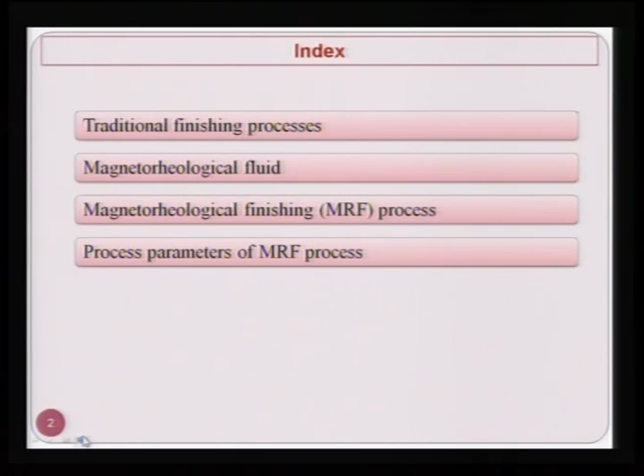Today I am going to discuss a finishing process that is named as Magnetorheological Finishing, abbreviated as MRF process. The contents of this talk are as follows: traditional finishing processes, magnetorheological fluid, magnetorheological finishing process, process parameters of MRF process, and applications of MRF process.

Traditional finishing processes - we have already seen at some other places, in some other course, three well known traditional or conventional finishing processes. These processes are known as grinding, honing and lapping.

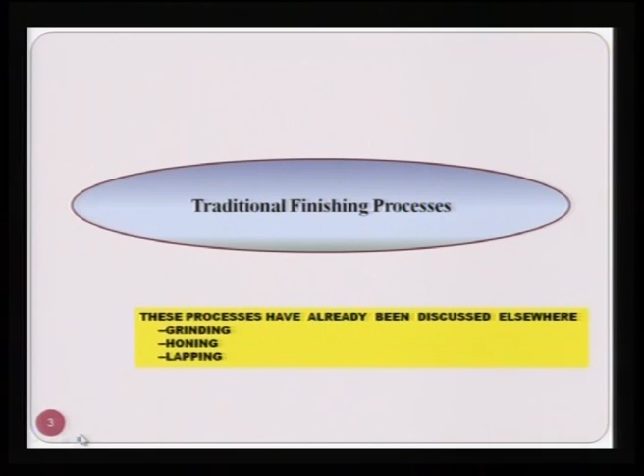All three processes have their constraints. Especially grinding has the limitation that it can only be applied for flat surfaces or cylindrical surfaces. Another problem with grinding is that a large amount of heat is generated, because of which thermal stresses are produced in the ground component. Thermal cracks are created, and this process cannot be used for a complex shaped geometry.

Honing gives a good surface finish, and not a very large amount of heat is generated, but it is limited to cylindrical, external and internal surfaces. Some other shapes can be machined, but not a very large variety of shapes can be machined by this.

The same limitations apply to lapping. Lapping is a very good, commonly used process, good for flat surfaces. It can give a very low surface roughness value, but it cannot be applied for complex shaped components. Also, to some extent in honing and lapping, some very fine thermal error or thermal cracks may be developed, which we will not be discussing here.

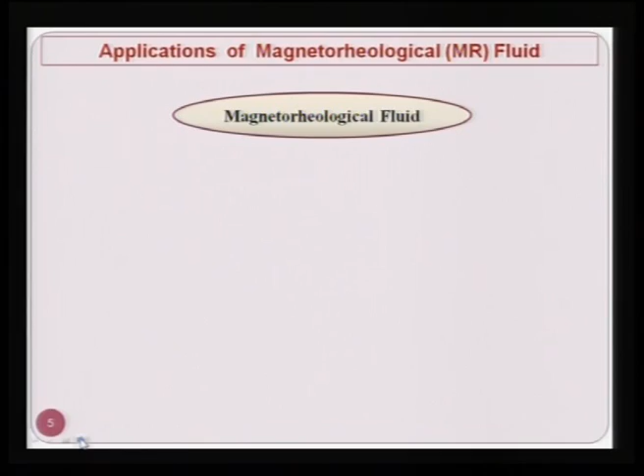Applications of magnetorheological fluid: magnetorheological fluid without having abrasive particles is also used for many other applications rather than only magnetorheological polishing. When we use this fluid for polishing purposes, we add abrasive particles which act as the finishing tool. As we will see here, the magnetorheological fluid has applications in clutches, brakes, dampers, etc.

The important point here to note is that this fluid uses non-magnetic abrasive particles. These particles include alumina Al2O3, silicon carbide SiC, and it can be diamond particles also. In this talk we are going to discuss the application of magnetorheological fluid in the field of finishing.

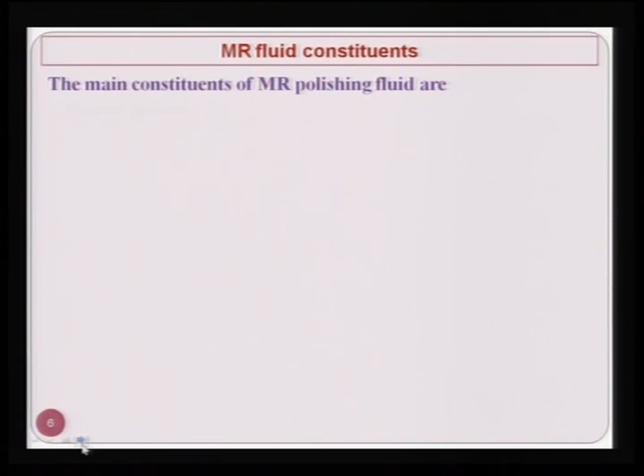Then there are various kinds of abrasive particles which are added to this fluid: cerium oxide, diamond powder, aluminum oxide, silicon carbide, boron carbide, etc.

The major constituent of any MR polishing fluid is the carrier fluid, and it makes a lot of difference as long as the performance of the finishing process is concerned. In case of certain workpiece materials, it is always recommended to use water as the carrier fluid, while in some other cases oil is recommended as the carrier fluid.

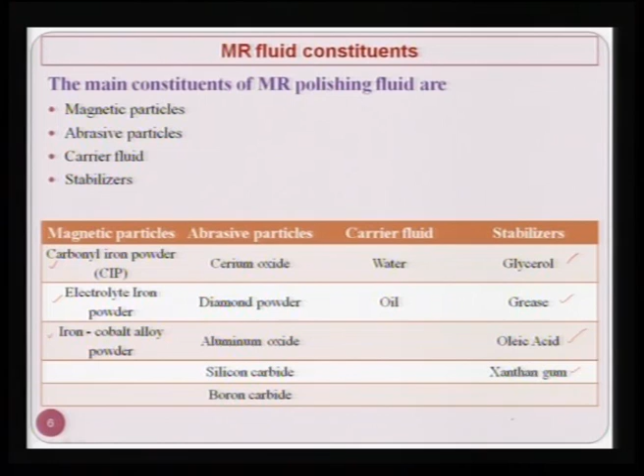When you mix magnetic particles and abrasive particles in the carrier fluid, these particles will settle down at the bottom because they have higher density compared to the carrier fluid. So we need what is known as a stabilizer, and there are various kinds of stabilizers used in magnetorheological polishing fluid - it may be glycerol, grease, oleic acid or xanthan gum. One of these is used depending upon the requirement.

Essential features of MR fluid for magnetorheological finishing process: optimum concentration of magnetic particles and abrasive particles is very important. If the percentage of these two constituents is very high, then the efficiency of the finishing process is going to go down.

High yield stress under magnetic field - here we are applying the magnetic field and the fluid is always subjected to it. So whatever are the properties of MR polishing fluid, without the application of magnetic field and with the application of magnetic field are going to be very different from each other.

Low off state viscosity means the viscosity of the fluid without the application of the magnetic field. Less agglomeration and good redispersibility should be there - the particles should not get agglomerated, otherwise they are going to affect the performance and quality of finishing. And once the magnetic field is no more, then the particles should get dispersed quickly.

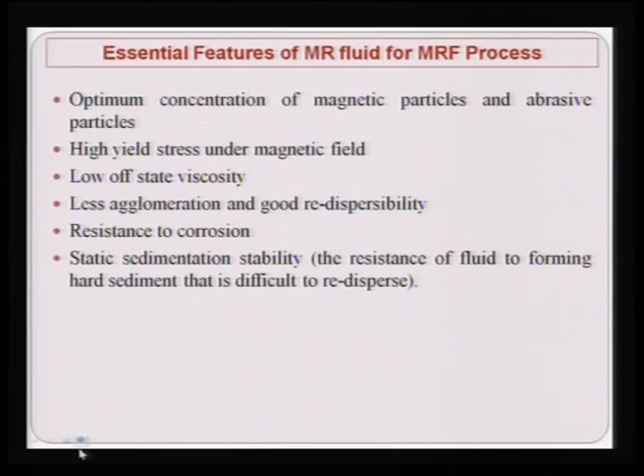And resistance to corrosion, static sedimentation stability, that is the resistance of fluid to forming hard sediment that is difficult to redisperse. That is what I mentioned earlier, that in static conditions they should be stable, meaning sedimentation should not take place, otherwise the properties of the fluid will change and that will not give the proper finishing.

High polishing efficiency, that is high removal rate without surface damage. Apart from high material removal rate, we as manufacturing engineers are always concerned with high finishing rate, because in finishing processes, finishing rate is more important than material removal rate. The objective is to achieve the desired surface finish without any defect in the lowest possible time, not to remove large amounts of material, but to finish and achieve the desired surface finish in minimum possible time.

Magnetic particles. The main functions of magnetic particles in the fluid are to form dense chain structure under magnetic field and to hold abrasive particles during the finishing process. This is very important - once the abrasive particles are held by the magnetic particle chains, it acts like a very soft grinding wheel, where the bonding material holds the abrasive particle and finishing is done. But once the fluid is out of the magnetic field zone, it will scatter and convert into an easily flowing liquid.

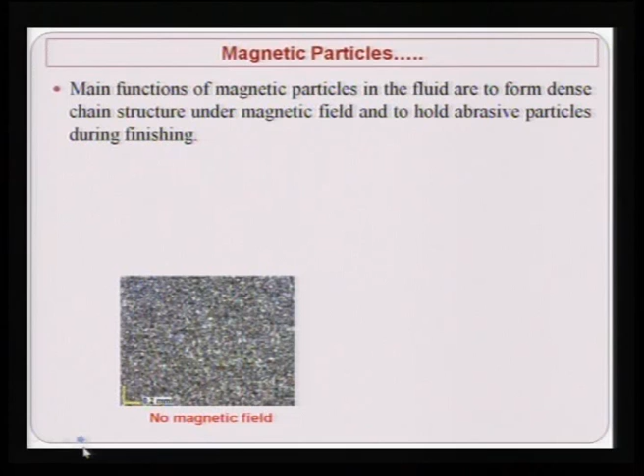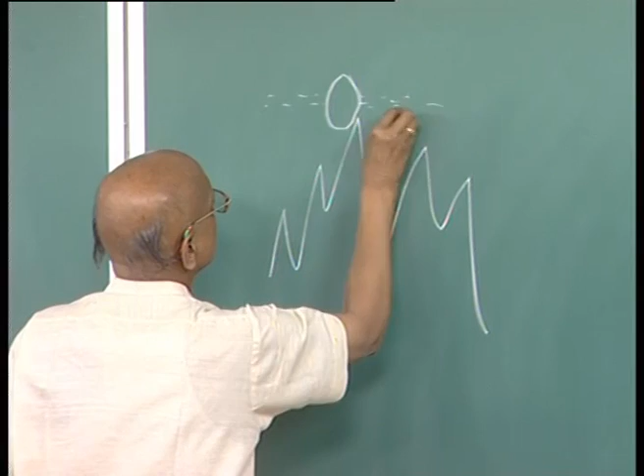I will show you something like this - this is the abrasive particle being held by the fluid chain, the chain of iron particles, and this chain is being pushed in this particular direction due to the rotation of the wheel. Then this peak will get removed like this, and the RA value, RMS value will keep decreasing.

Without magnetic field, magnetic particles are dispersed randomly in the MRF fluid as shown in figure 1a, and under the influence of magnetic field, magnetic particles align along the magnetic flux lines - here is the north pole, here is the south pole. This is the direction in which chains are formed, and in between the chains, some abrasive particles are held within or between the chains.

Many types of magnetic particles are available for MR fluid preparation. As I mentioned earlier, you can use carbonyl iron particles, although carbonyl iron particles are very expensive, electrolyte iron powder, iron cobalt alloy powder, etc.

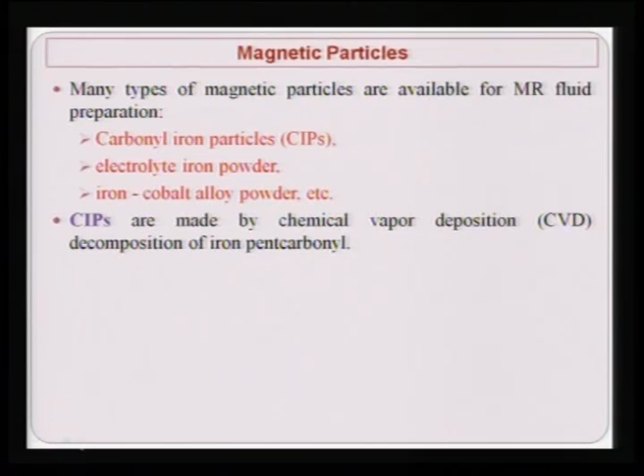CIPs are made by chemical vapor decomposition of iron pentacarbonyl, while electrolytic iron powder is prepared using the electrolytic or spray atomization process. CIPs are more preferable compared to others because they are magnetically soft, chemically pure, and have high saturation magnetization - 2.1 Tesla at room temperature, which is really a very high value of saturation compared to any other iron or magnetic particle.

Abrasive particles are non-magnetic materials in MR fluid responsible for material removal, as I mentioned earlier - these are the particles which really remove material from the workpiece, while chains of iron or carbonyl iron particles just act as the bonding material in the grinding wheel, holding these abrasive particles. When there is relative motion between the abrasive particle and the workpiece surface, material is removed in the form of microchips or nanochips depending upon the finishing conditions.

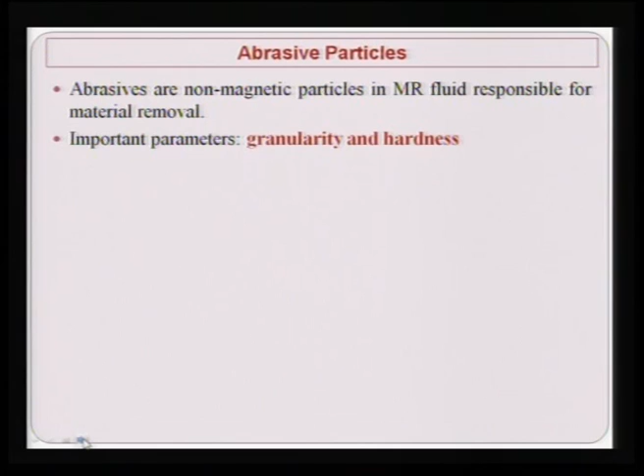Important parameters are granularity and hardness of these abrasive particles, which makes the difference as far as finishing rate is concerned. Commonly used abrasive particles are alumina Al2O3, silicon carbide SiC, cerium oxide CeO2, and diamond powder. Other abrasive particles can also be used depending upon their availability, cost, and the requirement of the process.

Polishing abrasives such as alumina and diamond powder have been used for finishing optical materials other than glasses. The diamond powder has high finishing efficiency, but it is too expensive, while the hardness of aluminum oxide is low. So, diamond particles can be used, but they are quite expensive. So, one has to see the application, then only diamond should be used as the abrasive particle for finishing purposes.

However, the most commonly used polishing abrasive and carrier liquid combination for magnetic field assisted finishing of all optical glasses, including many crystals, is cerium oxide and water respectively.

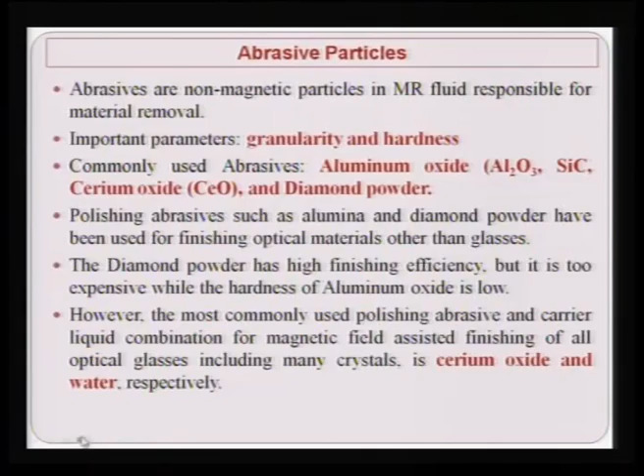The function of a carrier fluid is primarily to provide a medium in which the solid particles like carbonyl iron particles and abrasive particles are suspended.

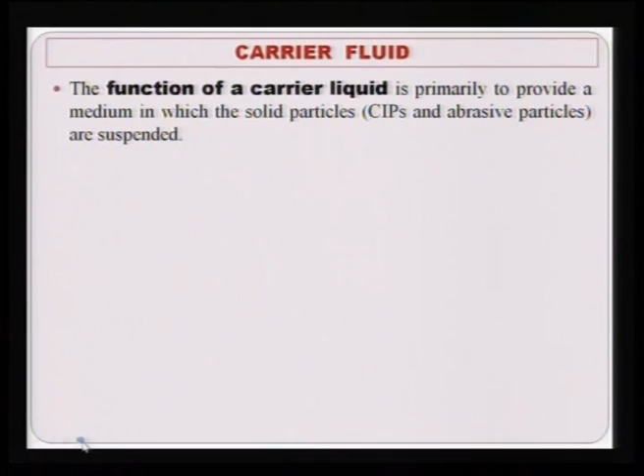The off-state viscosity of MR fluid should be as low as possible, so that it can easily reach the areas difficult to reach, because wherever this fluid reaches and wherever there is relative motion between the abrasive particle and the workpiece surface, finishing will take place only in those areas. Now, if fluid is not able to reach those difficult areas, then no finishing is going to take place, and you will not get the appropriate finished area as you want.

Important properties of carrier fluid are: carrier liquid should be non-corrosive with magnetic particles, that is the carbonyl iron particles or iron particles, abrasive particles like alumina, silicon carbide, diamond, etc., as well as the components used in the device, that is the machine or MRF machine components material.

Carrier liquid should have high boiling temperature and low freezing point, because heat is generated to some extent, and the carrier fluid should not start boiling, otherwise it will not be able to serve its purpose properly. It should have a low freezing point, because in many locations the environmental temperature is low, and it should not freeze, otherwise it will not serve the function for which the fluid is to be used.

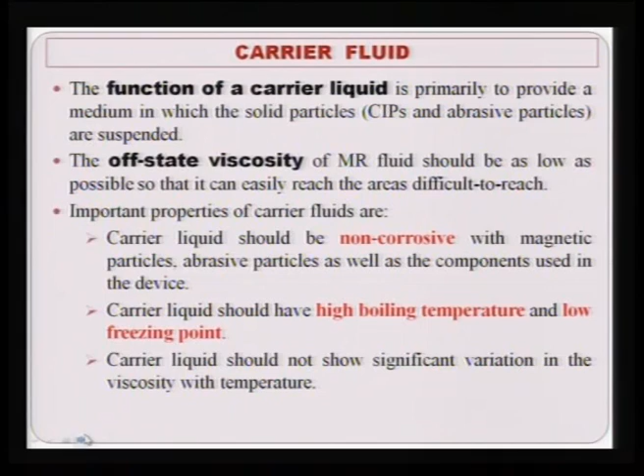Carrier liquid should not show significant variation in viscosity with temperature. As the temperature changes, the viscosity of the carrier fluid should not change substantially, otherwise it will not remain in the designed parameter condition. If it does not remain in the designed parameter condition, then you are not going to get the desired finishing rate and final surface roughness value.

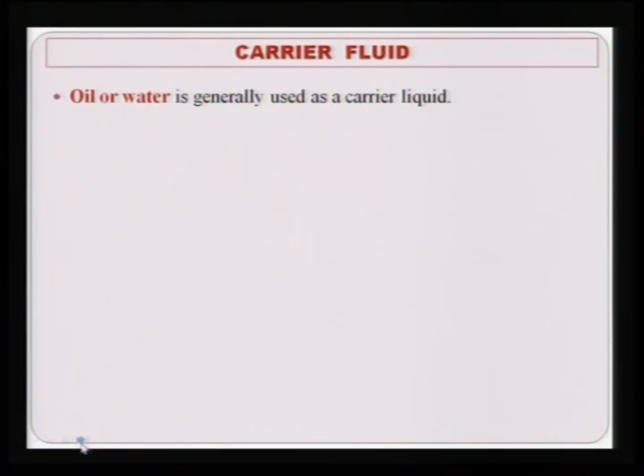Oil or water is generally used as a carrier fluid. Oil based carrier liquid has high viscosity, so MR fluid has good performance in stability and sedimentation. That simply means solid particles will not be able to sediment or settle down so easily, because oil has higher viscosity compared to water.

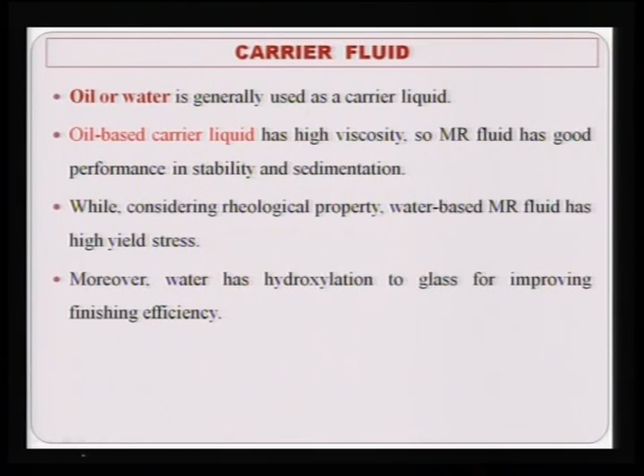While considering rheological property, water based MR fluid has high yield stress compared to oil based liquid. Moreover, water has hydroxylation to glass for improving finishing efficiency. In addition, water imparts cooling during finishing. Definitely the cooling rate in case of water is higher as compared to the cooling rate in case of oil.

Water has been proven as the most recommended carrier liquid for finishing silicon or silicon based materials. Invariably water is used in case of silicon or silicon based materials for finishing purposes, because it chemically reacts and is able to easily finish ceramics or ceramics based materials using comparatively soft abrasive particles.

Stabilizers: the stabilizer is used to disperse the magnetic particles and abrasive particles uniformly in suspension and to retard oxidation of the magnetic particles and prevent agglomeration, as I have emphasized earlier, so that they do not permit the solid constituents of the MR polishing fluid, that is CIP or carbonyl iron particles and abrasive particles, to agglomerate.

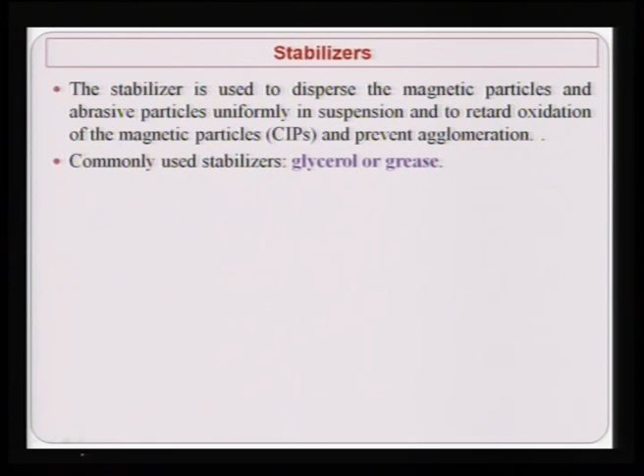Commonly used stabilizers are glycerol or grease. Stabilizers create a coating on the particles so that MR fluid can easily redisperse. That means due to the stabilizer, it tries to minimize the agglomeration of these solid particles or powder so that they can be easily dispersed in the fluid.

Solid particles in the MR fluid settle down at the bottom if kept in storage. The stabilizer has to prevent the dense magnetic particles from settling too fast and reduce the formation of hard sediment, which is difficult to remix, because we do not want hard sediment to be formed of the magnetic or non-magnetic particles. Otherwise, mixing of these particles becomes very difficult, and one should be very careful before using this MR polishing fluid.

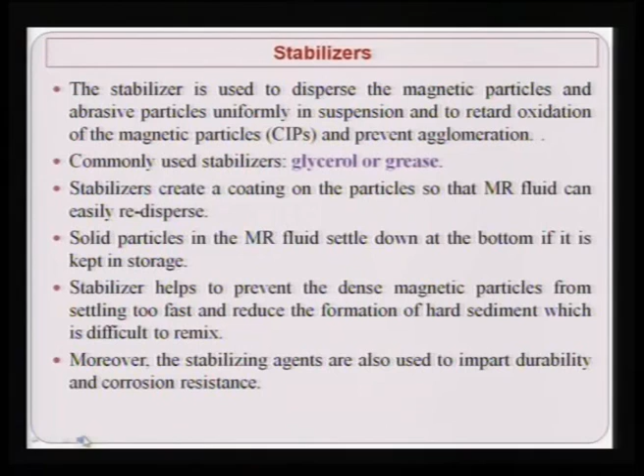It should be properly mixed for a good amount of time, otherwise the performance of the MR polishing will not be as desired. Moreover, the stabilizing agents are also used to impart durability and corrosion resistance.

Now, let us see some details of MR finishing or magnetorheological finishing process. Here I will show you an experimental setup which has been designed and fabricated at IIT Kanpur Manufacturing Science Lab.

Magnetorheological finishing. This process was developed in the beginning by the Center for Optics Manufacturing, Rochester, USA, for finishing high precision lenses, ceramics, etc.

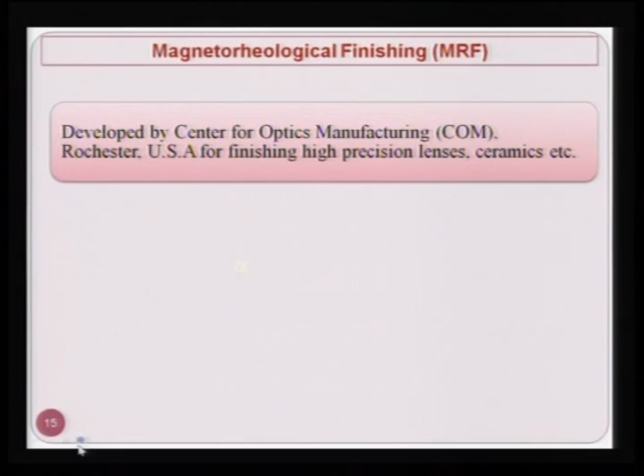MR fluid consists, as I have already mentioned, magnetic particles, abrasive particles, water or oil as the carrier fluid, and additives, specifically the stabilizers.

Stiffness of the MR fluid is a function of the magnetic field strength. Higher the field strength, stronger is the chain being formed by the magnetic particles, and the abrasive particles will be held more strongly compared to the case when the magnetic field strength is lower.

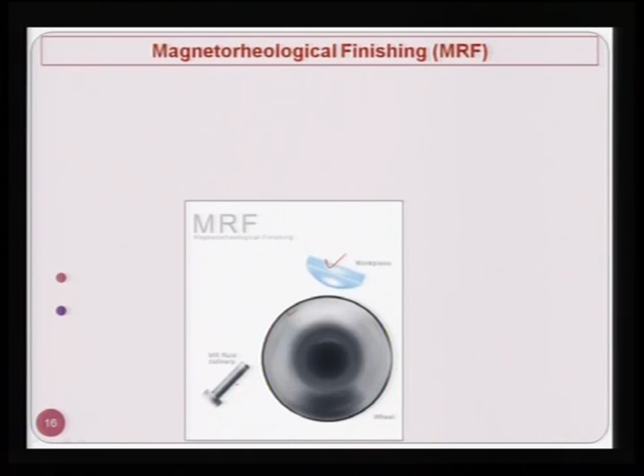Now you can see here the function of the magnetorheological finishing process. This is the lens which is to be finished, and here you can see pink color and other particles. Those pink color particles are the abrasive particles and the other particles are the magnetic particles. Only the abrasive particles are getting in contact with the lens and it is getting finished, and you can easily rotate the lens as well as move it in these two different directions, so that the whole surface of the lens is finished by this particular process.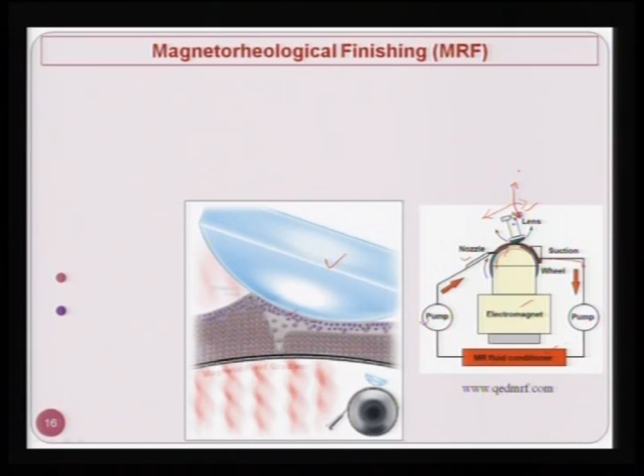Now, this is the lens, this lens is rotating and you can move it in this particular direction as well as in this direction, so that the whole surface of this particular lens is finished, and you can rotate the lens at its own axis also. Same thing is shown over here in the left hand side figure.

Fluid is extruded onto a rotating wheel in a thin ribbon that will contact the optical lens. You can clearly see here, this is the fluid, a thin layer between the lens and the wheel, and it is being extruded in this particular direction. Because of this, the normal force as well as the tangential force is acting on the workpiece surface through the abrasive particles which remove the material in the form of microchips or nanochips.

Precisely controlled zone of magnetized fluid becomes the polishing tool, and that is what you can see here. This particular ribbon part acts as the polishing tool. Here in this one you can see CIP shown by red color particles, and abrasive particles are shown by another color particle.

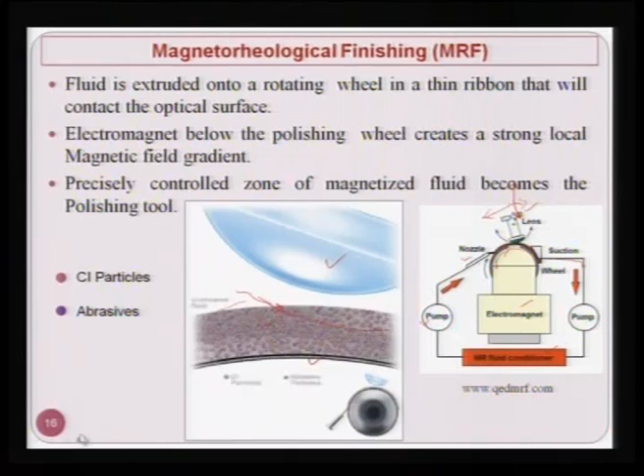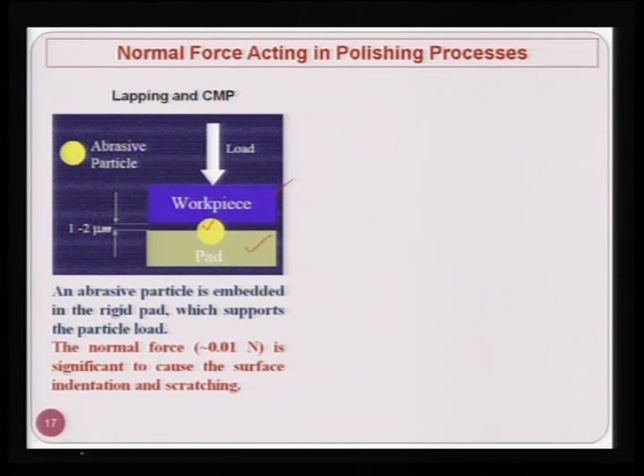The normal force, somewhere around 0.01 Newton, is significant to cause surface indentation and scratching, meaning it damages the surface of the workpiece. Although the normal force looks quite low, the size of the abrasive particle is also very low, it is micron sized, and so the stresses acting on the workpiece surface are quite large, leading to damage. That is why I mentioned that the rejection rate in case of CMP is quite high.

But if you see the MRF polishing phenomena, here the workpiece is in contact with the abrasive particles, but the abrasive particle is not in contact with any solid support; rather it is part of the MR fluid, and the force being applied on the abrasive particle is through hydrostatic pressure and magnetic buoyant force.

These are the two major constituents contributing to the normal force on the abrasive particle, which is transferred to the workpiece. The amount of force compared to CMP is much lower, as the particle-surface contact area is very small. The hydrostatic pressure results in an insignificant normal force of 10 raised to power minus 7 Newton, while in case of CMP it is 10 raised to power minus 2 Newton. So there is a significant difference in the magnitude of the force acting on the workpiece surface through the abrasive particles.

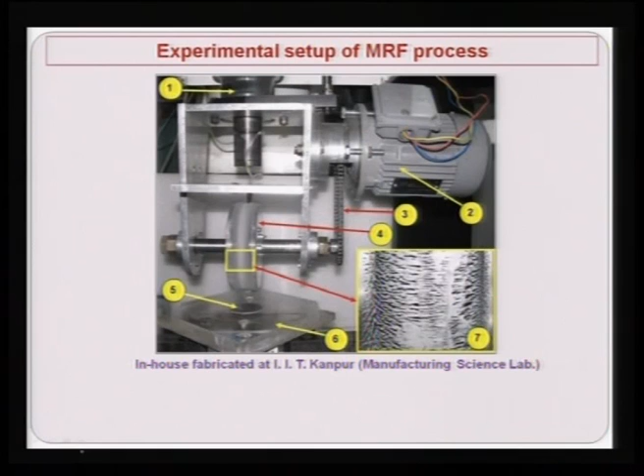Now this is the experimental setup, fabricated at IIT Kanpur. Here, one is the milling machine head. We have utilized a CNC milling machine for developing this MR finishing process setup, so this is the CNC machine head. Two is the AC motor, three is the chain drive you can see here, and four is the permanent magnet assembly. That permanent magnet assembly you cannot see from outside, it is inside, and instead of using an electromagnet, here we have used permanent magnets.

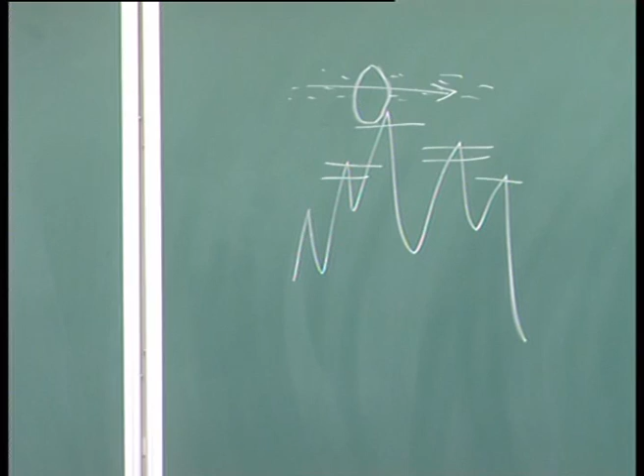Five is the workpiece shown over here, six is the workpiece fixture, and seven is the magnified view of the MR fluid ribbon being formed over here. As you can see here, these are the brushes being formed, and their strength depends upon the magnetic field strength. These brushes have abrasive particles outside, as we have seen in the video, and when these abrasive particles come in contact with the workpiece surface, they remove the peaks one by one, and the finishing keeps on improving. You can get surface finish less than 10 nanometers easily in this case.

Now this is the peak of the workpiece surface. The normal force is responsible for the penetration of the abrasive particle into the workpiece surface, and the tangential force is responsible for removing material from the workpiece surface in the form of a microchip. You can see here, this is the size of the microchip going to be removed, and the size of this microchip will depend upon the normal force acting, and if the tangential force is sufficient to remove that indented material, then it is going to give you the chip.

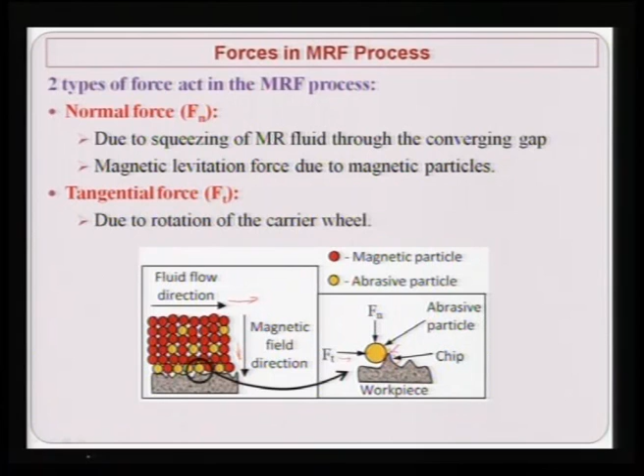Two types of forces act in the MRF process, as I have just explained. One is the normal force Fn, which is due to the squeezing of the MR fluid through the converging gap, and second is the magnetic levitation force due to magnetic particles. Another is the tangential force, which is due to the rotation of the carrier wheel.

Process parameters of the MRF process. Now, before I proceed, let me explain to you what the squeezing force is.

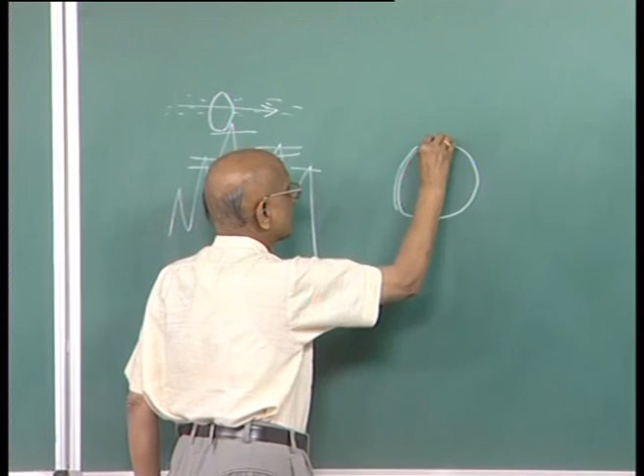In case of the MRF process, you have seen that there is a wheel which consists of a ribbon, and this ribbon is nothing but the MR polishing fluid consisting of abrasive particles and iron particles. If you see the enlarged view of this, as seen in the video film, these are the abrasive particles, while all the others are the magnetic particles over there, and these abrasive particles come in contact with the workpiece surface.

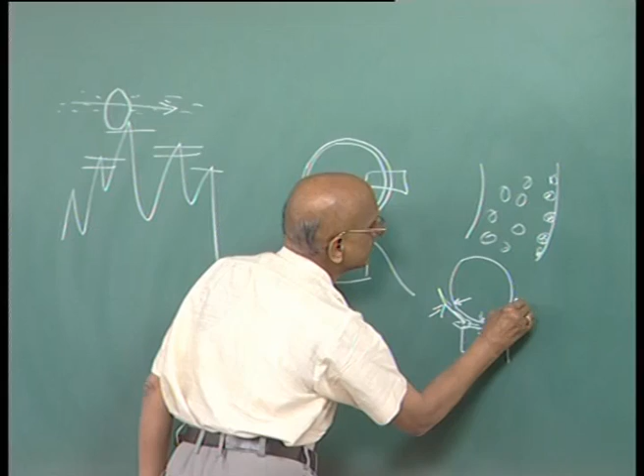Now, if you see the enlarged view, it is like this: this is the wheel, this is the workpiece surface. The thickness here is greater than the thickness over here, so squeezing will take place, the fluid will be squeezed all over here, and then it will be moving. When this squeezing takes place, it creates additional normal force on the abrasive particles.

Process parameters of magnetorheological finishing process.

Magnetic flux density is one of the very important process parameters. RPM, revolutions per minute of the carrier wheel, or indirectly the surface speed of the carrier wheel, makes the difference. Flow rate of the MR fluid, volume fraction of the carbonyl iron particles and abrasive particles, size of the carbonyl iron particles and abrasive particles, feed rate of the workpiece, that decides the relative velocity between the abrasive particle and the workpiece.

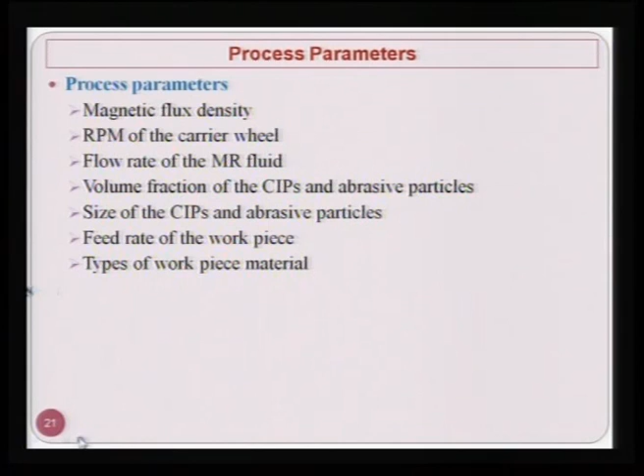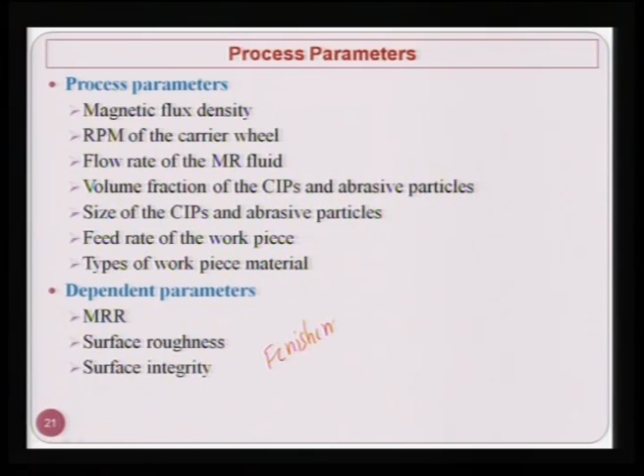Now there are certain parameters which depend on these finishing parameters, and these are also known as responses, which decide the performance of the finishing process. These include material removal rate, surface roughness, surface integrity, and the finishing rate, which has units of micrometer or nanometer per unit time, so it can be micrometer per second or nanometer per second.

Effects of magnetic particles: as I have already explained with these sketches, the main functions of magnetic particles are to form a dense chain structure under magnetic field and to hold abrasive particles during finishing. With the application of the magnetic field, it is able to form the chain structure, and it holds the workpiece abrasive particles within or between the chains.

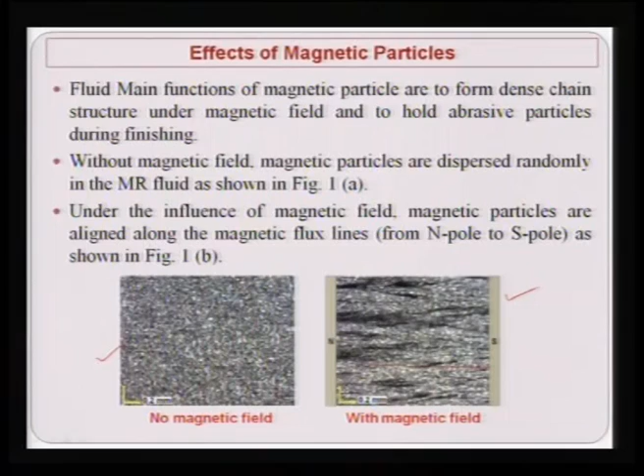Without magnetic field, magnetic particles are dispersed randomly in the MR fluid as shown in figure 1a. Under the influence of magnetic field, magnetic particles are aligned along the magnetic flux lines, from north pole to south pole, as shown in figure 1b. You can simulate these chains, as I mentioned earlier, with the soft bonding material of a grinding wheel.

Now what is the effect of abrasive particles? Concentration of abrasive particles significantly changes the finishing mechanism. At low concentration, particles are dispersed at different locations—some locations without abrasive particles, some with—and material is removed only by these abrasive particles, not by the carbonyl iron particles. A few abrasives are trapped in the CIP chain structure, so less discontinuous chains of CIPs are formed. Hence, CIP chains are capable of gripping abrasive particles firmly during the finishing process.

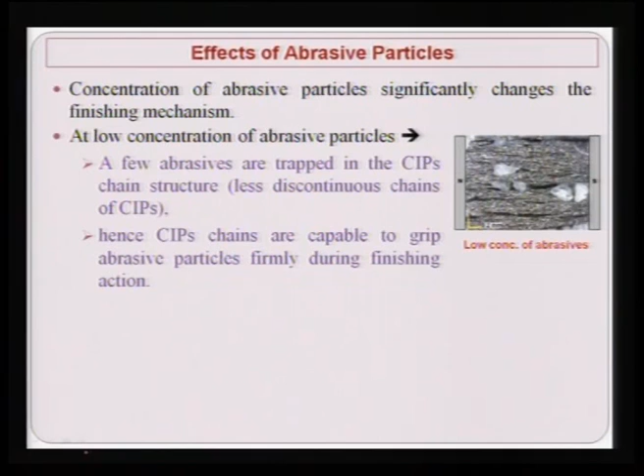Concentration of solid particles: it is also observed that total solid particle concentration, that is magnetic particles and abrasive particles, should not exceed 45 to 50% by volume in MR fluid. There are a few problems associated with high concentration of solid particles, such as low fluidity of MR fluid and high off-state viscosity.

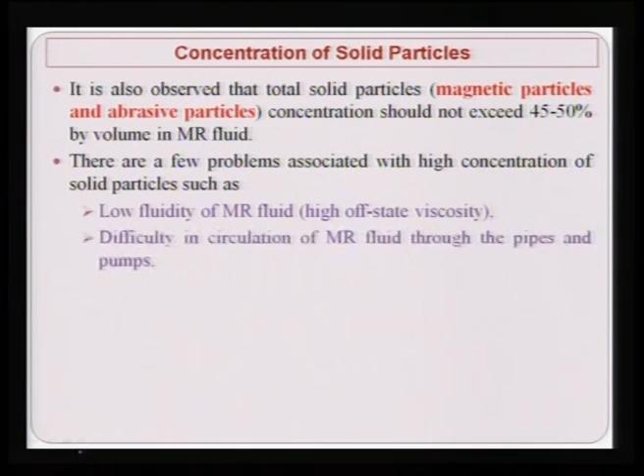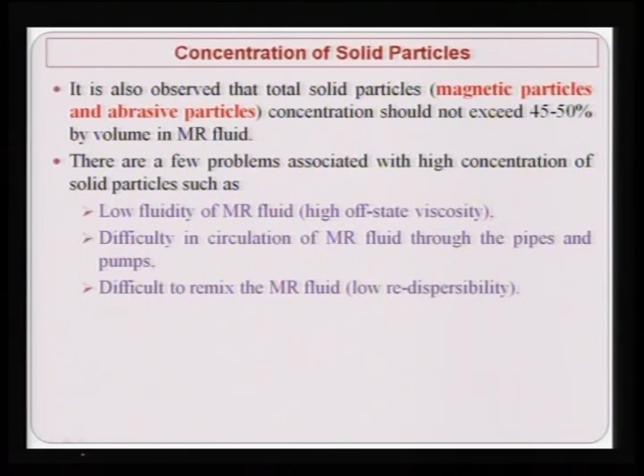If high off-state viscosity is there, it will not be able to reach difficult areas, and you may not get proper finishing, especially in case of complex shaped components. There is also difficulty in circulation of MR fluid through the pipes and pumps, and it is difficult to remix the MR fluid because low re-dispersibility is there.

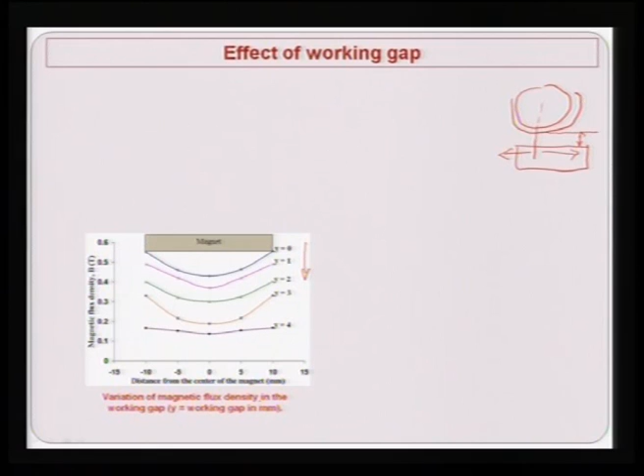Now you can see in this figure the distance from the center of the magnet. Suppose here is the magnet, so this is the center—on the left side it is negative, on the right side it is positive. It shows distance from the center of the magnet versus magnetic flux density. You can clearly see that as the distance increases, the magnetic flux density decreases, which is obvious. So it shows variation of magnetic flux density in the working gap, where y is the working gap in millimeters, on the y axis.

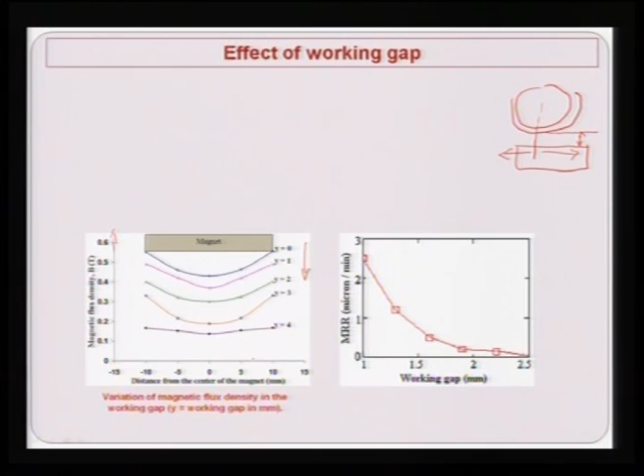As the working gap increases, the material removal rate decreases. This is because as the working gap increases, the magnetic flux density decreases, and as magnetic flux density decreases, the holding power of the fluid on the abrasive particles also decreases. So the abrasive particles are not able to penetrate deeper into the workpiece surface, hence material removal rate decreases.

As the working gap decreases, magnetic flux density increases. At high magnetic flux density, the CIPs are firmly aligned along the magnetic lines of force and create a highly dense structure. Therefore, abrasive particles are firmly gripped by the dense CIP chain structure, which results in higher MRR at lower working gap, as shown at the left side of the figure.

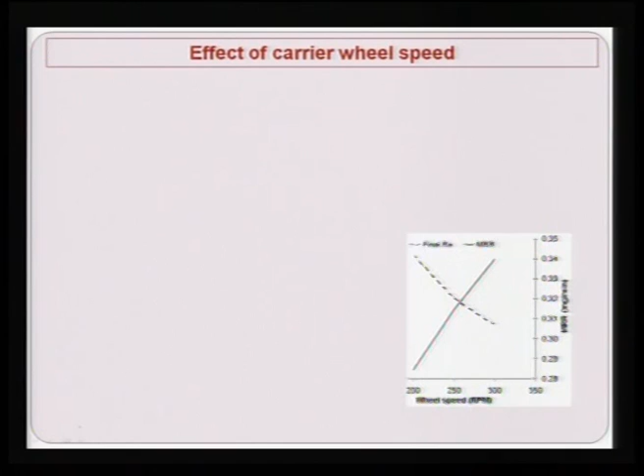Effect of the carrier wheel speed. This figure shows the effect of wheel speed on final surface finish and MRR. Final RA decreases and MRR increases with increasing carrier wheel speed. As wheel speed increases, MRR increases, but the final RA value decreases, meaning better surface finish is achieved.

It is assumed that the MR fluid ribbon moves with the same speed as the carrier wheel speed, that is, there is no slip condition between the wheel and the fluid ribbon. Therefore, with the increase of wheel speed, the speed of the abrasive particles also increases, hence the shear force applied by the abrasives on the workpiece surface also increases.

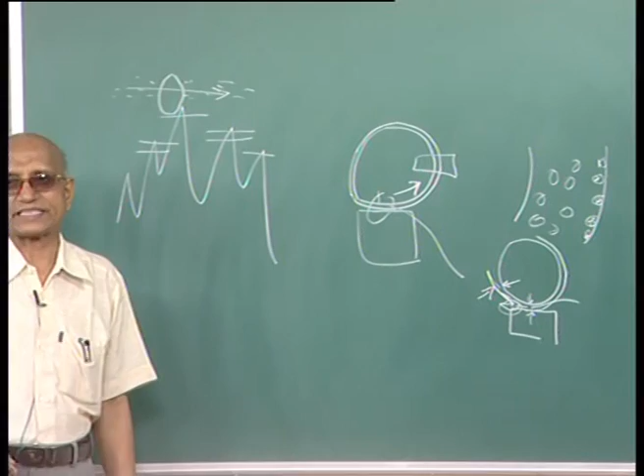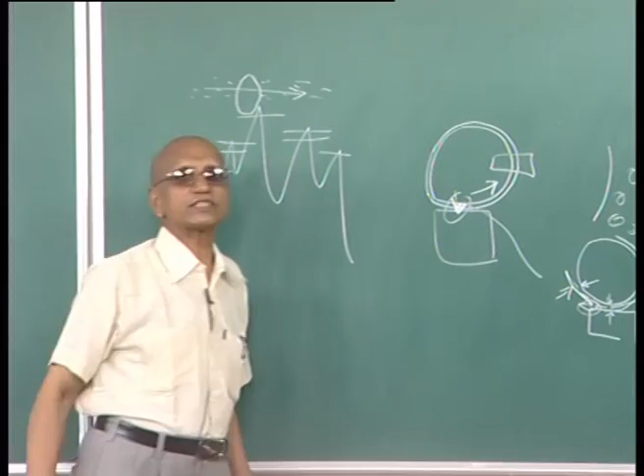As the RPM of the wheel increases, the surface speed of the wheel's outer periphery increases, and if the surface speed of the outer periphery increases, then whatever abrasive particle is there, its speed with respect to the workpiece will also increase. This is very similar to a higher cutting speed in conventional metal cutting, which is why you get a higher material removal rate.

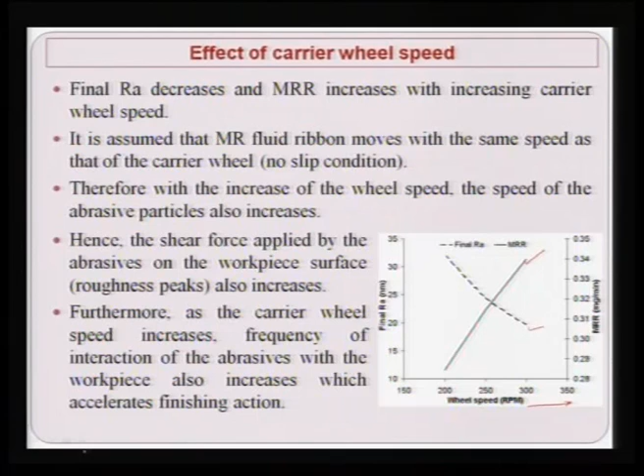Furthermore, as the carrier wheel speed increases, the frequency of interaction of the abrasive with the workpiece also increases, which accelerates the finishing action. This is very simple to understand.

As I mentioned earlier, if normal force is too high, the abrasive particle penetrates quite deep inside the workpiece surface, and when it has to remove material, the tangential force also needs to be large enough to remove that whole amount of material.

But if the tangential force is smaller, the chain structure will break, and the abrasive particle itself will rotate such that the depth of penetration decreases, and with lower depth of penetration it will be able to remove material from the workpiece.

As you can see here, the depth of penetration has decreased compared to this particular case t. This becomes the depth of penetration as T dash, and T dash is smaller than T. Since the depth of penetration has decreased, the total tangential force required to remove the material in the form of a microchip will be reduced.

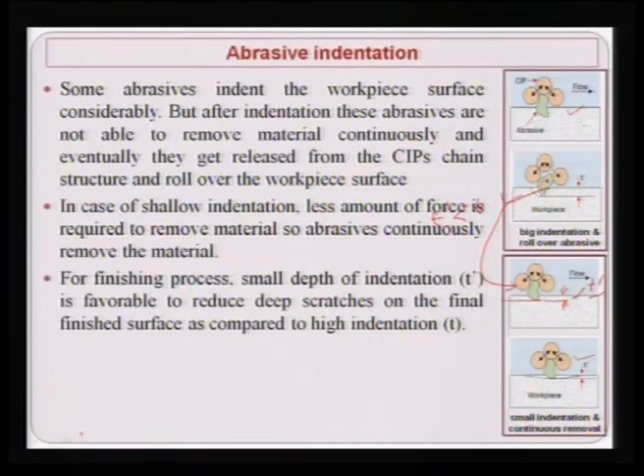For the finishing process, a small depth of indentation is favorable to avoid deep scratches on the final finished surface compared to high depth of indentation. So it is always desirable to have a smaller depth of indentation, meaning a smaller force compared to the larger normal force. The bonding force between CIPs and abrasives, as well as the cutting force, should be higher than the force required for material removal.

Effect of MR fluid composition: water and cerium oxide is the most preferable combination for finishing silicon material.

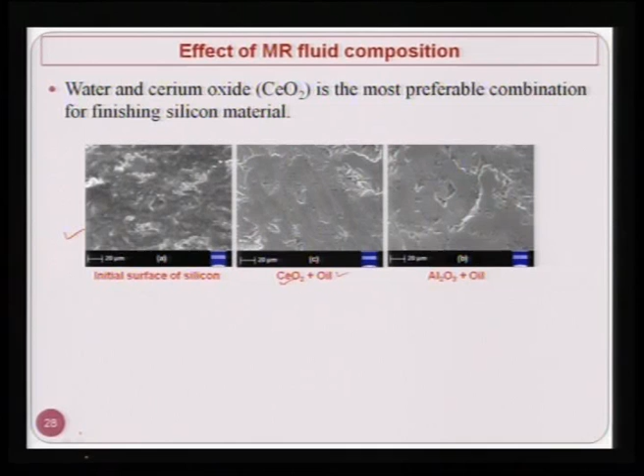Here you can see the initial surface of the silicon, and this is the surface after finishing for a certain period with oil as the carrier fluid and cerium oxide as the abrasive particles, soft abrasive particles. Then finishing was done with alumina as the abrasive particles and oil as the carrier fluid, and you can see the improvement in the surface finish.

Now let us see some of the applications of the magnetorheological finishing process.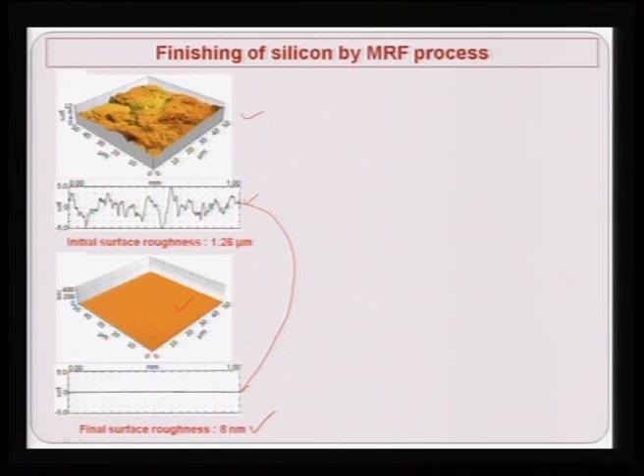Here is MRF quilt pattern removal. You can see the initial surface before finishing and the difference with the finished surface. Flatness is clearly visible, and the RMS values are also very different: 1070 nanometer RMS value before, while in the finished surface it is only 17 nanometers.

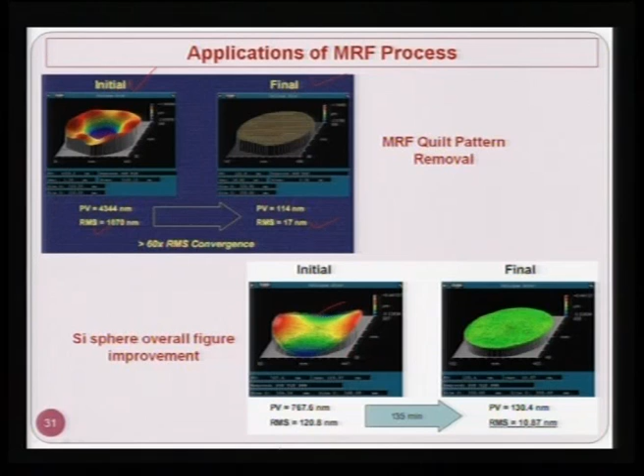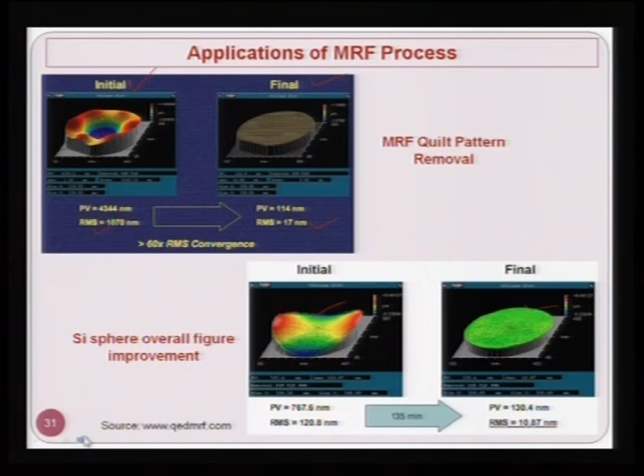Another example: silicon sphere overall figure improvement can be clearly seen here. This is the initial surface and this is the final surface. The flatness improvement is very clear, and the RMS value has come down from 120.8 nanometer to 10.87 nanometer in 135 minutes, approximately 2 hours. This has been taken from this particular source.

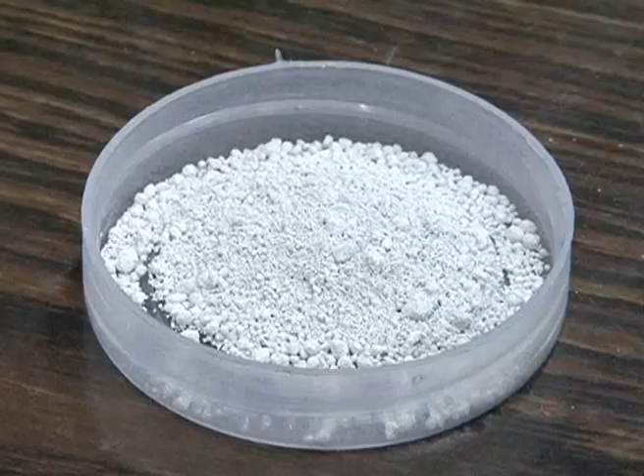The basic component of the MRF process is magnetorheological fluid, and presently I am showing you the preparation of magnetorheological fluid, how it is prepared here. Abrasive particles are required to increase material removal, in other words, to reduce finishing time. In the present case, the abrasive is aluminum oxide.

Carbonyl iron particles, in other words magnetic particles, are required to make the MRF fluid stiffen under the effect of a magnetic field. When the magnetic field is applied, the iron particles align along the lines of magnetic field and create a dense structure. Water is required to provide a liquid medium so that magnetic particles as well as abrasive particles disperse uniformly.

Some additives are also required in the MRF fluid so that magnetic particles as well as abrasive particles remain suspended in the fluid and to reduce the sedimentation problem. In the present case, it is glycerol.

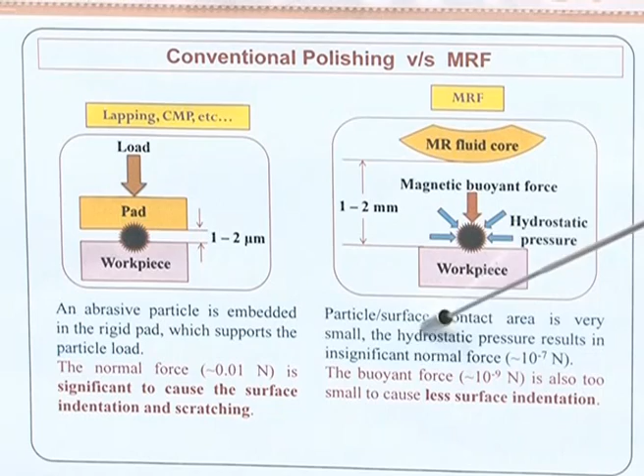In MRF process, the particle surface contact area is very small so that the hydrostatic pressure results in insignificant normal force, around 10 to the power minus 7 Newton. Furthermore, the buoyant force is also around 10 to the power minus 9 Newton, too small to cause surface indentation in MRF process. From this comparative view, you can see that the MRF process is far better than conventional polishing for nano finishing of different components.

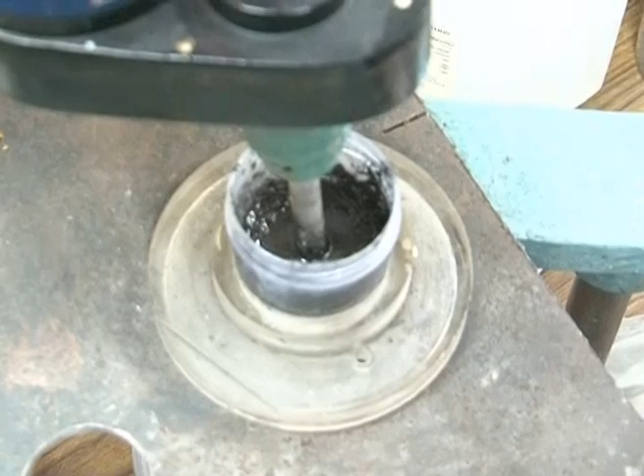All the constituents such as magnetic particle, abrasive particle, water and glycerol are mixed together in a proper concentration. After adding all these constituents, it is stirred for at least 1 hour to get it mixed homogeneously.

Now you can see all the constituents of MRF fluid are homogeneously mixed. Now this fluid is ready to use in the MRF process.

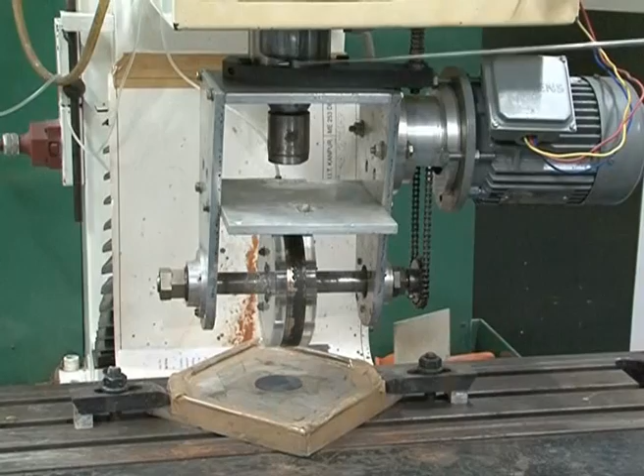The whole setup is connected to the Z axis of the CNC milling machine so that the working gap can be adjusted by the computer control. You can control X, Y and Z movements simultaneously by giving the motion.

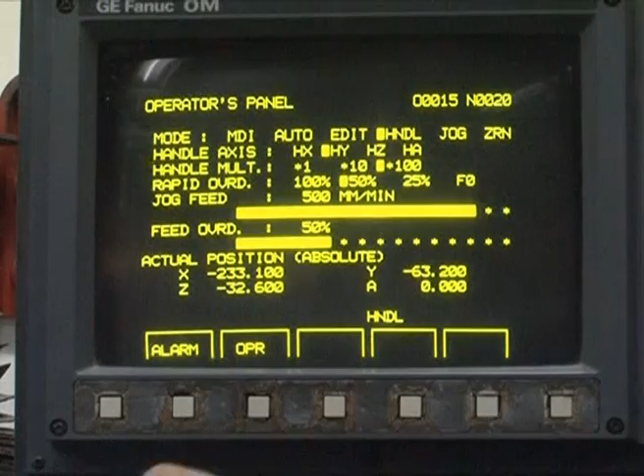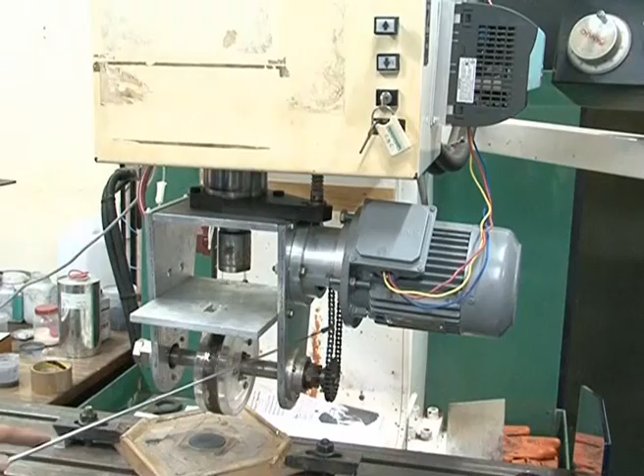This is a permanent magnet which is covered by 2 perspex sheets, and this whole assembly is called the carrier wheel. The carrier wheel is connected to the AC motor through this timing chain, and this AC motor is again connected to the variable frequency drive, so that the wheel speed can be controlled automatically. You can even give a particular value of the wheel speed so that it rotates at that particular value only.

It is also required that most of the components should be non-magnetic, so that the magnetic field lines should not be distracted by these components. This is a workpiece and this is the workpiece fixture. In the present case, this workpiece is single crystal silicon, which is to be finished up to nanometer level by this magnetorheological finishing process.

Now MRF fluid is applied on the carrier wheel. Now you can see the MRF particles, or the magnetic particles, are aligned from the north pole to south pole on the magnet. You can clearly see the chain structure of the MRF fluid particles.

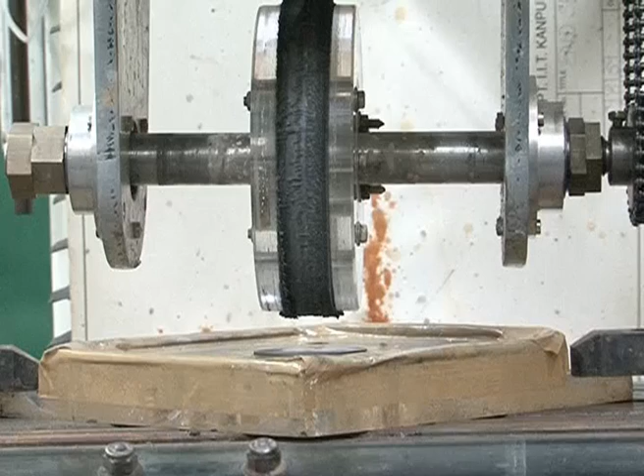After that, a particular gap is set between the workpiece and the carrier wheel by changing the Z-axis position. Once the gap is fixed, rotation to the carrier wheel is given. X and Y movement can also be given to the carrier wheel so that the whole workpiece surface can be covered.

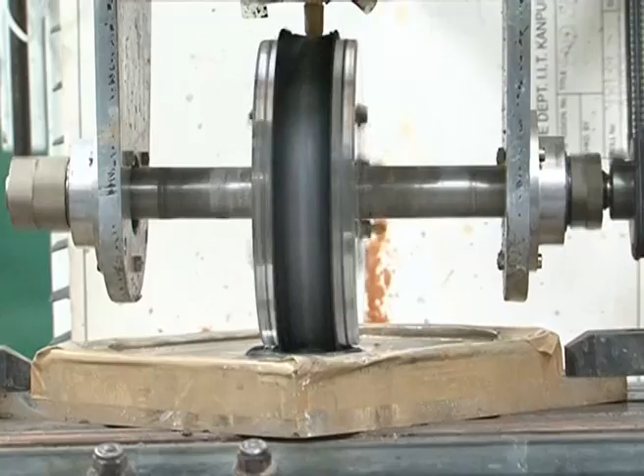Here you can see the stiffened MRF fluid is interacting with the workpiece surface. At the finishing zone, two types of forces are exerted on the workpiece surface. One is tangential force, applied by the rotation of the carrier wheel, and another is the normal force, due to the flow of stiffened MRF fluid through the converging gap, because the gap is slightly smaller than the thickness of the ribbon applied on the wheel, and the hydrodynamic action of the MRF fluid also creates some normal force. This process is continued till the desired surface finish is achieved.

Now I will show you the finished as well as unfinished silicon workpiece surface. You can easily see the difference between unfinished and finished silicon surface. This is the unfinished surface, where no reflection is visible. Now this is the finished silicon surface, and you can easily see the reflection of IITK and CSIR on the finished surface.

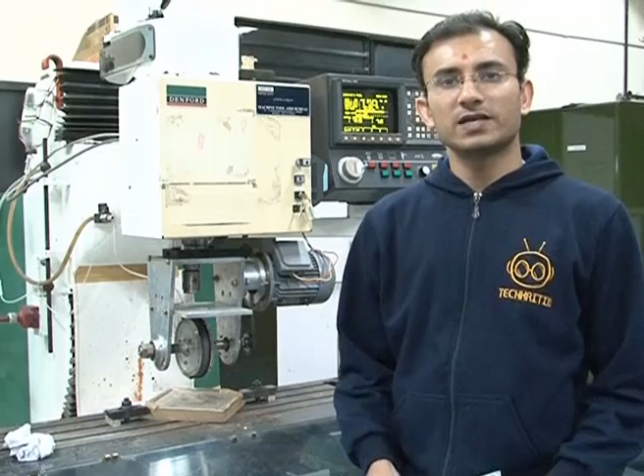The present result shows that the MRF process is a very efficient process for finishing optical as well as hard material. Thank you for your attention.